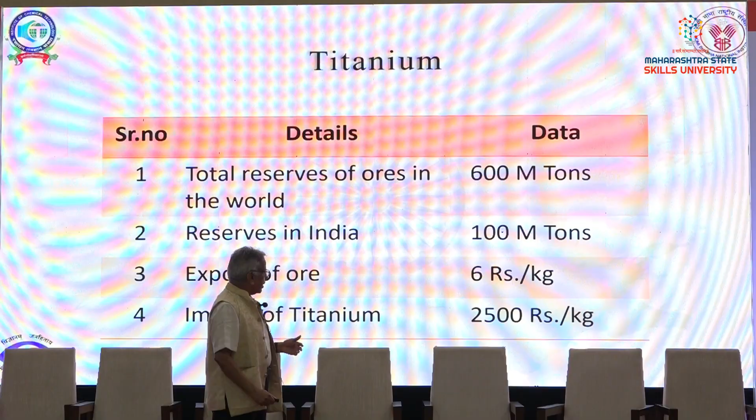नेक्स्ट स्लाइड. मी आता 3 ते 4 उदाहरणं सांगणार आहे की आपल्याला प्रॉब्लेम दिसतो कसा आणि त्या प्रॉब्लेमचं सोनं कसं करायचं, त्याच्या काही स्टेपवाईज प्रोसिजर्स असतात का.

पहिलं जे आहे ते वेस्ट ॲग्रिकल्चरल बायोमास. आपण वर्तमानपत्रात वाचतो की हे वेस्ट ॲग्रिकल्चरल बायोमास आहे, ते पंजाब आणि हरियाणा राज्यांमध्ये खूप जास्त - सगळ्यात सुपीक जमीन तिकडे आहे आणि हे जे त्यांचं वेस्ट आहे ते जाळतात.

नोव्हेंबर आणि डिसेंबर महिन्यामध्ये पोल्युशनचं स्टँडर्ड असं आहे की 1 मीटर क्यूबमध्ये जास्तीत जास्त 1000 पार्टिकल्स असावेत. हे जाळल्यामुळं किती पार्टिकल तयार होतात? 5000 पर्यंत. कसं आपण या देशामध्ये राहतो, आणि असं फक्त पंजाब हरियाणामध्ये नाही, आपल्या सगळ्या देशभर हा जाळला जातो. जळलेलं कधी लपत नाही, आपल्याला कळेलच की कुठं काय जळतं आहे. आता ह्याच्यातून किती शक्यता आहेत मी पटकन सांगतो.

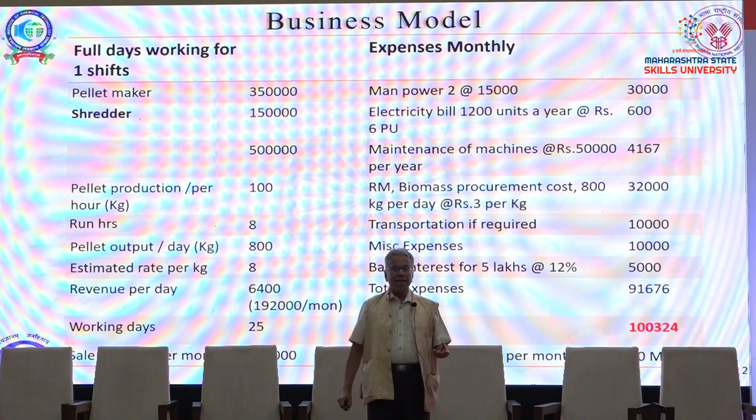So in this case, what we did, I held about 20 workshops of 20 housewives each, and asked them, there are so many improved cook stoves offered by the government, even free, why are you not using them? In every workshop there were nice answers, and I collected all those answers, and that became the objectives of my research.

A very interesting thing - I asked them, do you want it free? In 20 workshops, no woman told me that they want it free. So I said, if I improve the efficiency from 12% to 50%, how much are you ready to pay for this chula?

They said 700 rupees to 1,000 rupees. A good enough problem was defined.

For the new cook stove, we developed computational methods to understand the efficiency. The software program that our students developed at ICT can design an atomic power plant, and it can design a chula too. I am their teacher, but as a teacher I know that designing a cook stove is more difficult than an atomic power plant. I have designed atomic power plants also.

So we need to respect this - there is nothing like a negligible problem. The answer was, if burning has to be efficient, oxygen has to reach every point. That is most important. So what should be the design of the cook stove, so that the flows generated by internal circulation, natural convection, dispersion and diffusion make oxygen reach everywhere? That was the innovation.

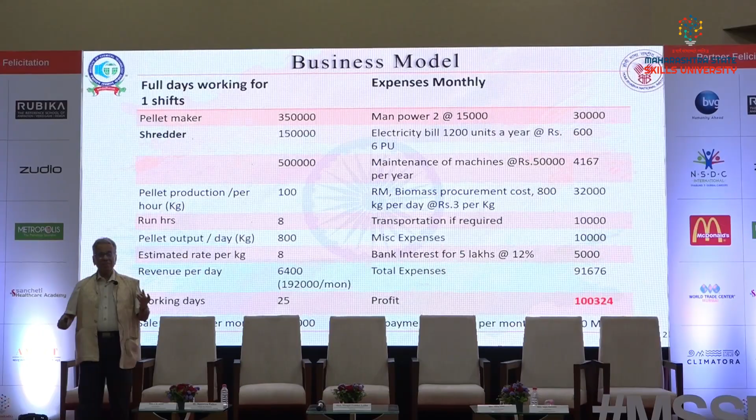Generate a happy atmosphere around you. Start from the family. When you go home, go to your mother directly and tell her whatever you have done for me up till now, I'm blessed, I'm so happy because of you. Tell her every week. Tell your father at least once a month. Husbands should tell wives, wives should tell husbands, my life has become meaningful. Tell your friends too. Create an atmosphere which is positive, happy, and pleasing.

On the surface you should have a visibly pleasing, smiling personality all the time. Those people can innovate - this is my message to all my dear friends. Everybody, irrespective of your height, your hair color, whatever you are wearing, shall be successful if you remember these two things: don't complain in life, and create a positive atmosphere around you. These two will be sufficient for individual success.

So this is the business plan for cook stoves. Please go ahead.

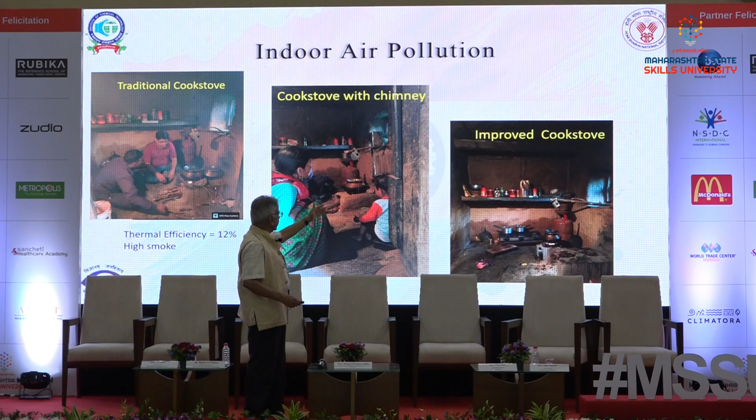Whatever is agricultural residue, we can make natural gas, CH4, by fermentation. And this is the effort being done in Pune.

This is the owner of the company. This is a synthetic cow - you put grass inside and you get methane gas outside.

It is impure, so you improvise it, clean it, compress it, and you will see rickshaws and trucks running on it. Such a wonderful business - big companies have advertised that they are going to put 50,000 plants across the nation. But if they again import such reactors, it will cost 5 times more.

We will remain poor all the time unless we develop our own technology. I have plenty of examples worth 60,000 crores where we developed the technology ourselves - if we had purchased it from outside, it would have been unsuccessful as a business because the capital cost would be very high. But all these Ambanis and Adanis, the basic technology comes from here, and they will take it.

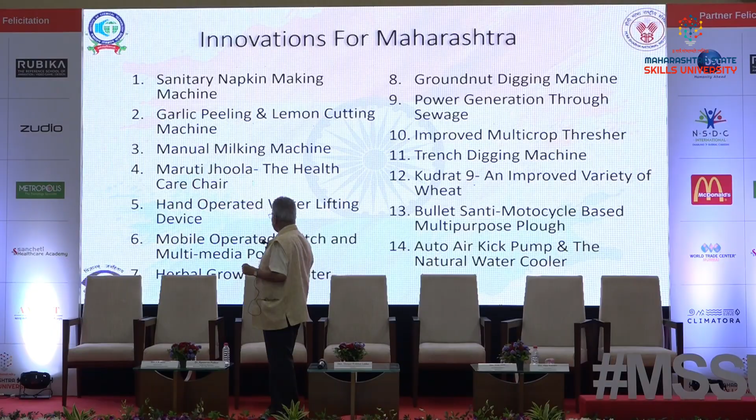That titanium story I told you - we are developing technology where we sell at 6 rupees a kilogram to nations and we buy back at 2,500. This technology has advanced quite a bit, and we are claiming we will make titanium at the price of aluminium, which is 230 rupees a kilogram. Right now we are importing at 2,500 rupees a kilogram.

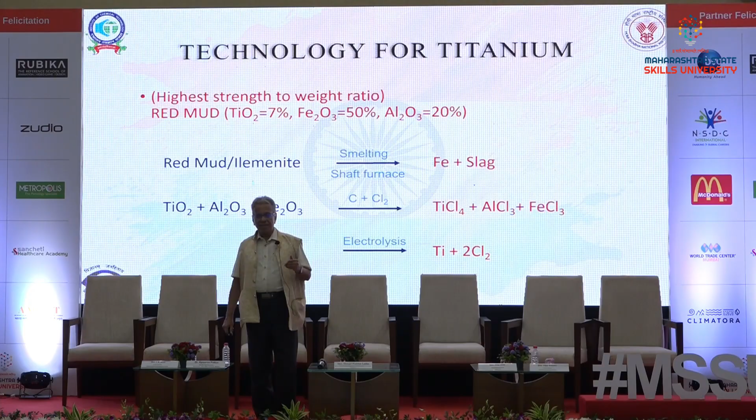How much wealth - bamboo. If you grow it, we have proven we can improve the fertility of land by 25% to 50%.

We need not grow rice and dal since the number of mouths to feed is more or less the same. So whatever land becomes free, grow bamboo - bamboo grows at 150 tons per year, whereas all other crops give waste biomass of only 10 tons per year. So instead of waste, make this a business and grow bamboo.

All bamboo-related active people are going to come to me on the 19th of this month to discuss how we should proceed. Some bamboo is used for structural things, some for beautifying things, but that entire usage is not more than 2 to 3%. We have a huge quantity of bamboo, and the growth rate is so high we can create even more.

Solar energy. There is a National Academy of Engineering in the USA, and every year they post the demanding problems of the nation and of the world. One such problem was solar energy - they said if you can make it at $75 per square meter, it will be useful and become economical.

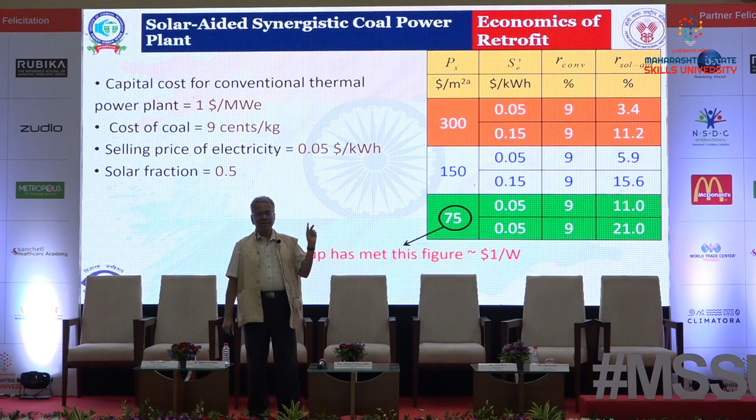So our people have made it. This is about an 18 square meter pilot plant, and we are going to commercialize this.

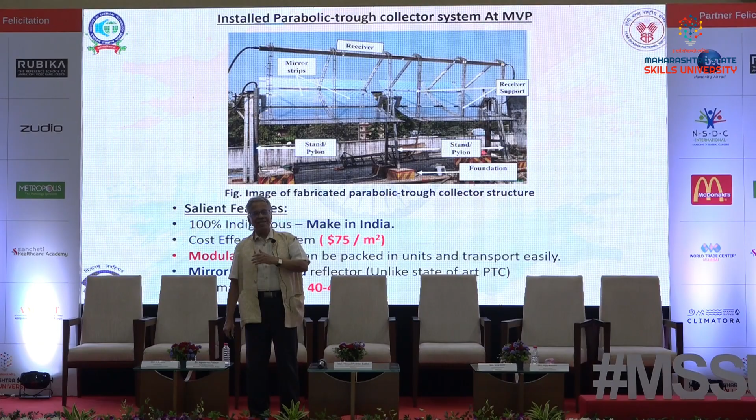On the other side, the most prestigious journal in the world is Nature, and whatever innovations we made, we sent to Nature and they published the article. So on one side I am happy and famous as a big scientist because I have published in Nature, and on the other side I am working for society - and this is immensely possible.

This is that journal and reference. I will stop here. Let me tell you this.

Nanotubes you may be knowing. We got information - we are having a quarrel with China, and on the frontier our soldiers are there and their soldiers are there. Both are wearing bulletproof jackets, but our soldiers are wearing bulletproof jackets imported from China. Try to understand the intensity of the problem, how to get the problem.

This is the problem - if China says right now you are paying us 1,50,000 rupees per bulletproof jacket, now you give 15 lakh rupees, or 15 crore rupees, we will not give you, then imagine the status of our soldiers on the frontier - they won't have bulletproof jackets.

So I wanted to make a bulletproof jacket with the help of students, and let me admit one thing - the innovations I keep telling you about, 95% of the contribution has been made by you young students. They are innovative, they just need small direction here and there, and they do a wonderful job.

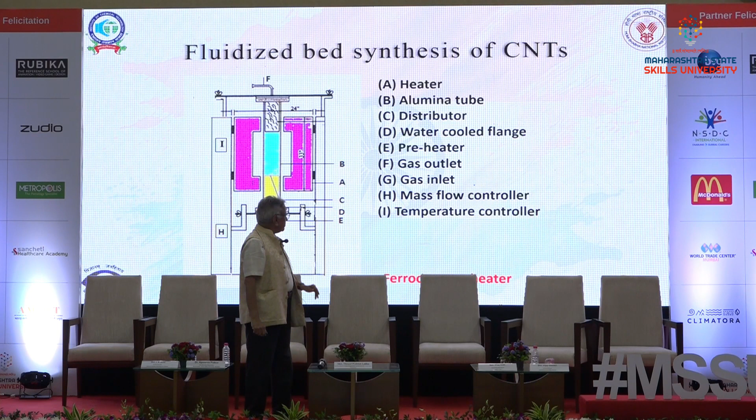He made it, and he has 40 years remaining, while I am at minus 15 years - I retired 15 years ago. And I have all the awards and honors that a scientist can have in this nation. Nothing is remaining. So these are the real heroes.

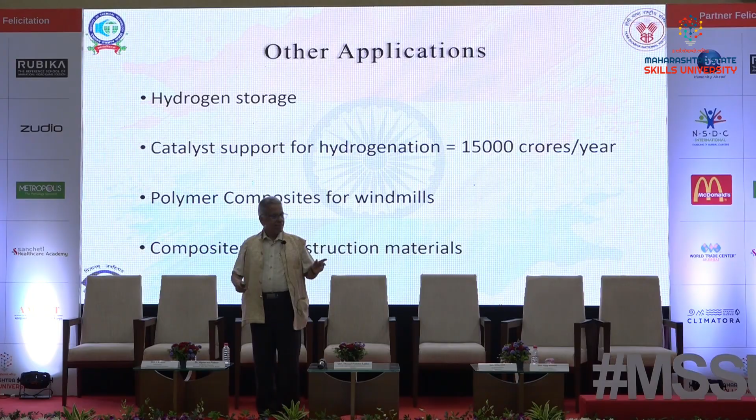Next slide. How many other applications are there in carbon nanotubes? We are working on all that, but I will not go into the details.

This is yet another opportunity to make our entire industry efficient and make our industrial activity competitive in the world. I will not go into details, but I have an 8-step procedure by which each activity can be analyzed computationally and mathematically, and we can get an answer for why a particular activity is demanding so much money and our cost of production is high.

This has been done, and our institute is doing again and again the improvisation of profits. Starting 2 months from now, I'm going to hold workshops for industrial people, 30 at a time, for 1 week, covering how to go systematically - how many experiments, how many simulations, how much modeling, how much pilot plant - so that you really understand where the money is getting wasted and why we don't become competitive.

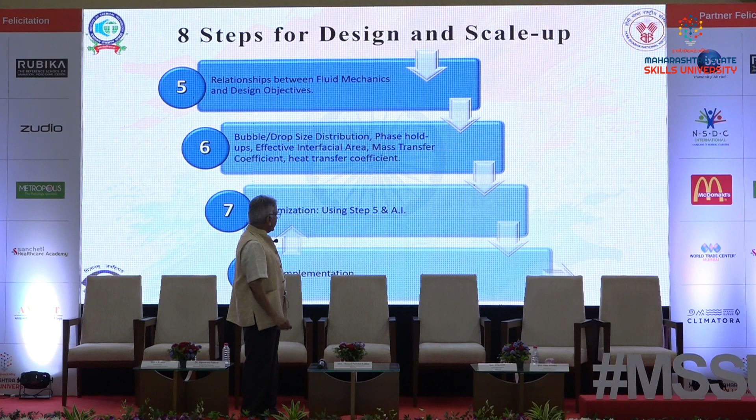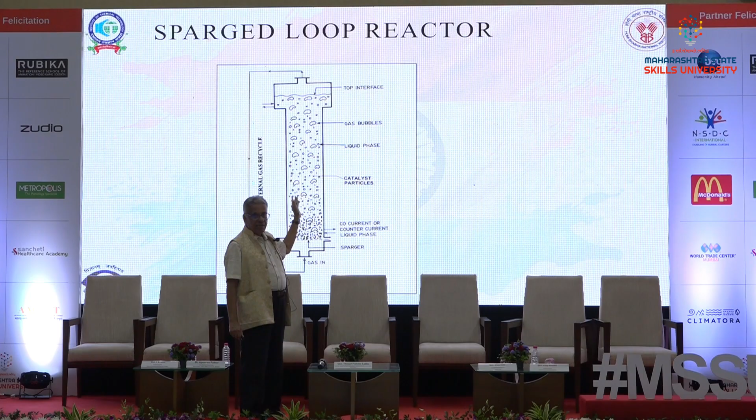Next slide. All this is the 8-step procedure, and these are examples where I have improved efficiency many times over. If the profit was 20%, profit was increased by 100%.

This is yet another example. Imported equipment was 10 crores; we have made it for 15 lakh rupees.

My lecture was really finished, but just give me 2 more minutes. It is completed.

Two important points I have already told you: develop the habit of concentration of mind and be smiling all the time. The third point I am telling you here is that we get a good crop if the land is fertile. Therefore, we need to spread scientific temper in the society.

And that is the job Marathi Vigyan Parishad is doing for Maharashtra, and I am presiding over that organization right now. Through about 80 different programs - day before yesterday I was in Solapur, and the Solapur city gave such a wonderful response.

So, regarding entrepreneurship, we have just started an MBA in our institute - MBA in social entrepreneurship. By social I mean solve a social problem, create wealth for yourself, and let the generated wealth go to the bottom of the pyramid. That is the principal objective. Thank you so much.